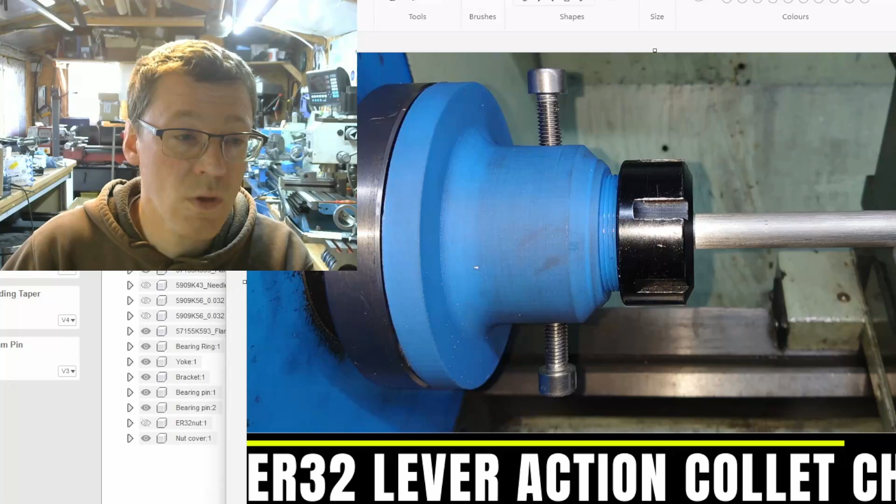Now, a little while ago I made a video about this ER32 lever action collet chuck, which I made a prototype of, and there was a lot of really good feedback, and I've taken what I can of that feedback and fed it back into the model and basically brought it to essentially a complete model. I haven't built it in metal yet, but let's have a look.

As you see here, it's a bit more developed than last time, so I wanted to sort of finish this concept, push this through to a slightly more finalized design, and I think I've got there using some of the feedback that I was given. A lot of the feedback would have pushed the design in a different direction, or basically meant a completely different

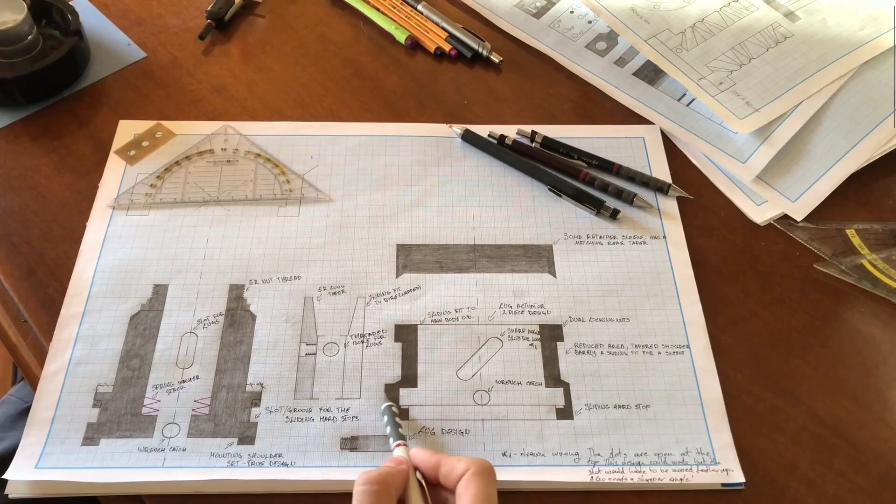concept of operation. So one of my viewers very kindly made a video explaining his thoughts on it and how it could be made better, all of which were really good ideas. However, it did change the way it would operate quite significantly. But the completed model is now available on Printables.

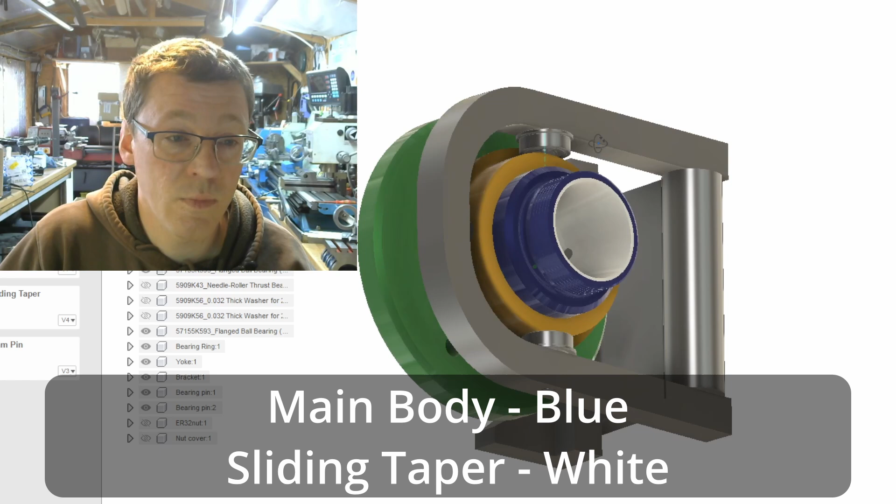I've uploaded the Fusion file and the drawings for the core components, which are the main body, which is here, the sliding taper inside, the bearing ring, which is this yellow ring here, which the lever bearings roll on, and the lock ring in the back, which retains the Belleville washers.

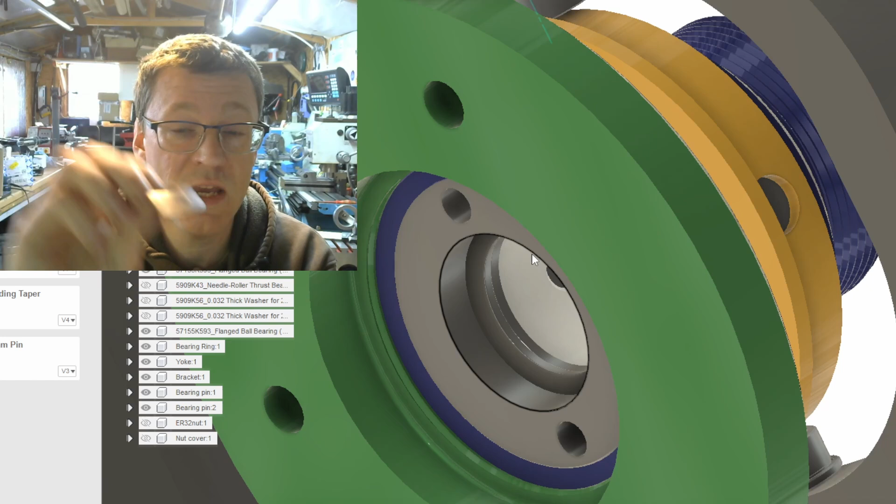I don't think in the last video I told anyone what the actual washers were. They are 40mm outside diameter, 20.4 internal by 1mm thick. Now they provide around about 1,000 newtons of force, and they provide about 1mm of travel each. So I've got them stacked up opposite to each other. That's basically what we call series. That gives me 2mm of travel with the same amount of force.

If you put them both the same way up and stack them, I'm not sure this really shows up on the camera, that puts them in parallel, and that would double the force required, so it's effectively making it twice as thick. That's the nice thing about these washers. They can be stacked in series and parallel to give you different spring rates and behaviors.

The 1,000 newtons should provide a reasonable amount of clamping force. One of the comments fed back that the 130 newton meters of torque that an ER32 nut can be torqued up to, that's sort of a maximum value, would equate to about 18,000 newtons of clamping force. Now, this is 1,000 newtons of pushing force on the back of the collet, so I still don't really know how that translates to clamping force. I don't know whether it goes up or down, but 130 newton meters is a lot.

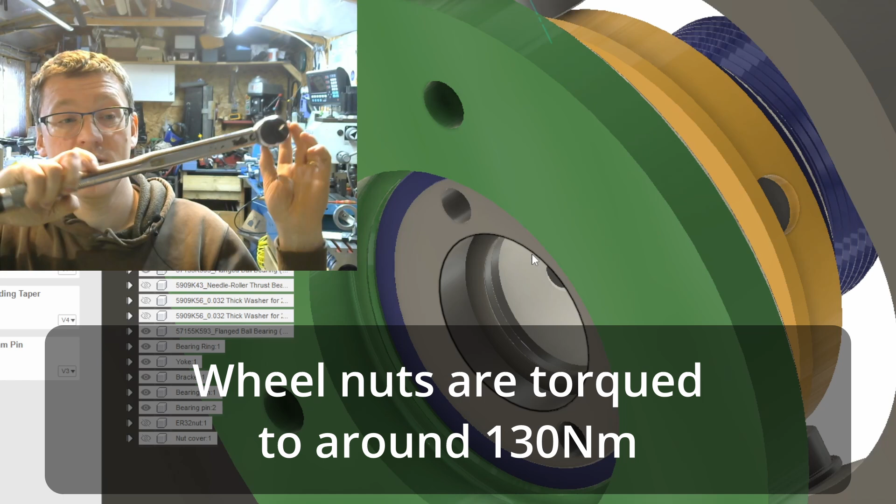This is the torque wrench that I use to do up wheel nuts on my car. It's about 2 foot long. These are the tools that I use to do up my ER32 collet chuck, and they're about 1/3 the length of the torque wrench. So there's no way I'm putting 130 newton meters of torque onto my collet chucks, and

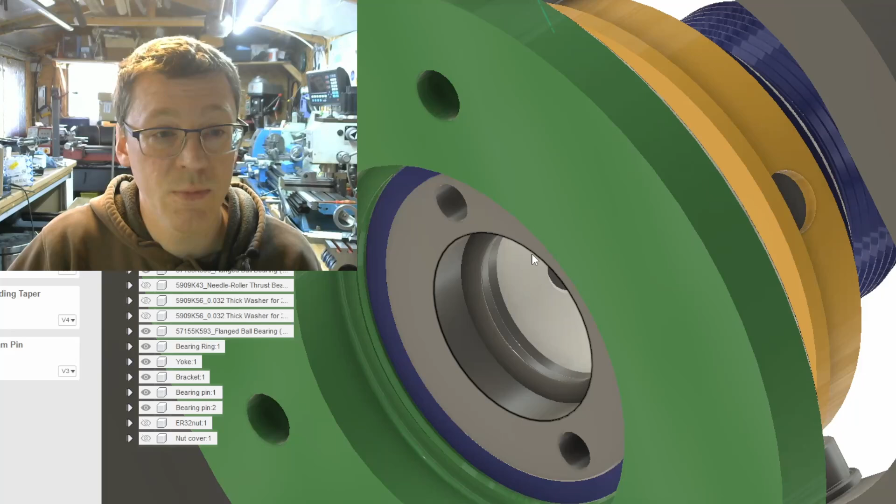I've not had slippage issues, which I'm hoping means that when this thing gets fully built up in metal, whether it's just one of these or whether we need to double them up or get some thicker ones just for a bit more force, I think there should be enough force to do some useful work with this collet chuck.

I wanted to address a few of the comments that were made because there were lots of them. So if you're interested in all the comments, just go to the old video, that's where you'll find them. But I'll just go through a few of them here that are immediately pertinent to the design. So one question was, why? And essentially, a lot of people have got ER collets and don't necessarily want to invest in another collet system.

So I came up with this idea, it's been brewing in my head for a long time, and the idea being that it's small, compact, relatively easy to make, and it would mean you could have a quick action collet chuck using an existing collet system if you happen to already have ER collets. There's also a bit of an interesting problem to look at. I'm not a mechanical engineer, so even though it's a simple mechanism, it was just trying to work out how the sliding and rotating bits would all work together.

A lot of people seem to like the idea of using the Belleville washers, and that was one of the driving reasons for this particular design. I've never really used them before, so I just wanted to do something that used them and get a feel for how they work, what kind of forces are involved. You can read the fact that they take 1,000 newtons to compress on a data sheet, but for me at least, until I've felt that in reality, I don't really know what it means.

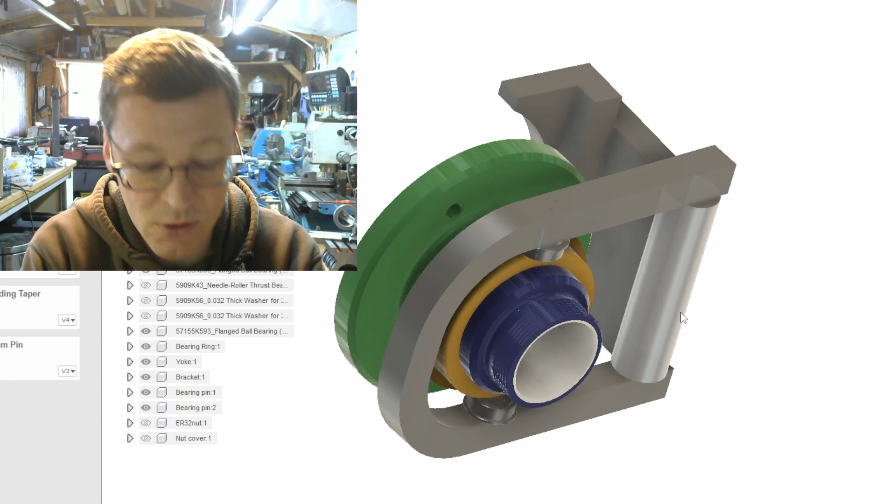Someone said, why would you ever need such a thing in the home shop? You probably wouldn't. The idea behind this was, like I said, just an interesting problem that I wanted to solve. But quite often with tools, you don't know you need it until you've got it, and then you find reasons to use it. I think that's why a lot of us have got many of the tools we have, not because we need them, but because we want them.

One really valid concern was stress on the bearings of the headstock and the casting. Now, the bearings for my lathe are these large taper roller bearings. These are good for 8,000 newtons of force through them. So if there was the full 18,000 newtons of force going through these bearings, that would probably be bad.

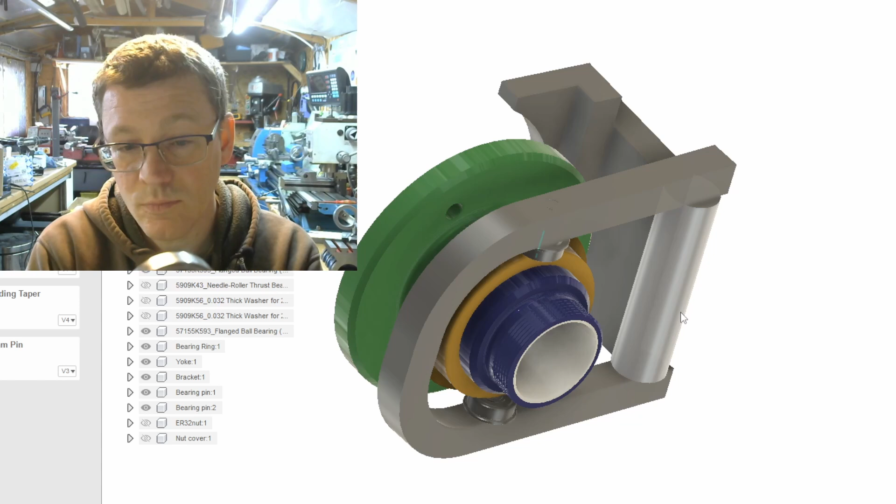But at the moment, with the configuration I've designed, it's 1,000. I think you could easily take that up to 4,000 and not really do any damage. Remember, it's only a transient load. These are rated for 8,000 newtons of continuous load. Obviously, that does include the preload that you put on them.

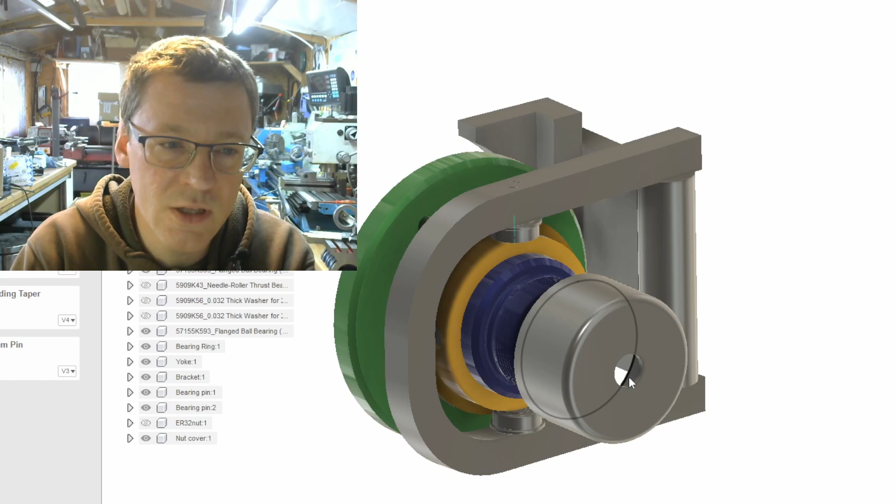Another thing was that the slits in an ER collet can easily get swarf in them when you're machining things, and you'd have to clean it out every time. My solution to that is a cover, which would be made out of some flexible material, 3D print or something, and that would just push over the collet nut. Make a series of them with different size holes, or you could make a hole with some slits in so it conforms to different size material. But I think that's relatively easy to keep the swarf out from that end.

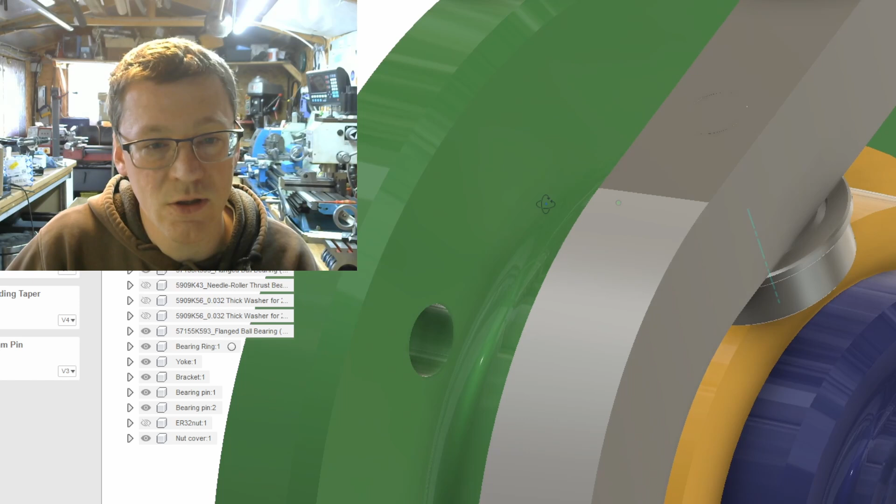The other area where swarf can get in is around the bearing ring, where the slot is for the actuating arms. However, I've designed this bearing ring to cover up the entire slot, both in the open and closed positions, so that you shouldn't ever really get any dirt inside the chuck. Now, obviously, you could get dirt inside from the back direction, but as long as your spindle bore is clean and you're using the front cover, then you shouldn't ever get any swarf in the spindle bore.

One really great suggestion was a set true adjustment. That's when you've got some screws around the perimeter of your back plate so that you can adjust it to run perfectly concentrically. That would be a brilliant addition to a commercial product so that you could true it to your lathe. The thinking behind this one, though, is that because you're going to be making this on your own lathe, should you choose to do so, the taper in the chuck should be completely concentric to your lathe. Then it's just a case of rotating the collet in the nut when you set up to get the best concentricity you can.

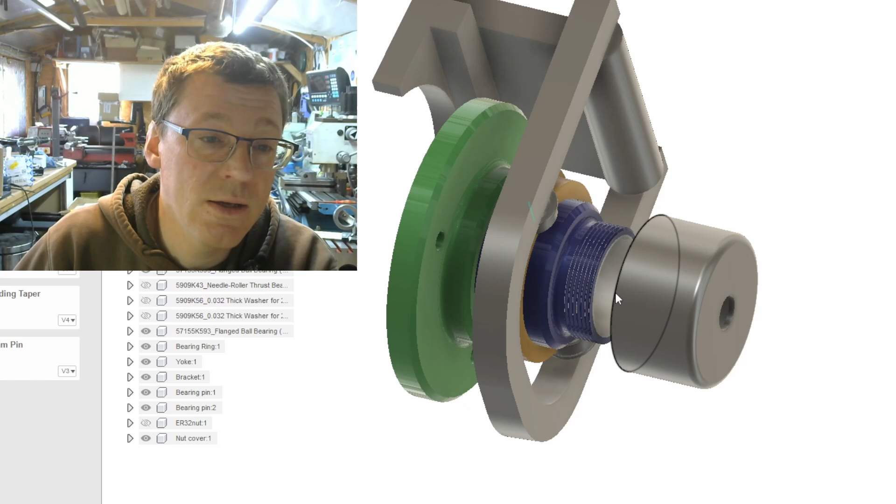As the sliding taper goes in and out in a linear fashion, you should never rotate the collet, assuming when you pull the bar out for your next part, for instance, if you've just got a long bar in there, assuming you don't twist, then it should stay pretty concentric.

Now, there were loads of suggestions for even better improvements, like doing an over-center mechanism, like on the We Can Do That Better video, which lots of people suggested. I have seen that. That's almost certainly a much better way of doing it, but it deviates from the initial concept. So this is a Belleville washer, spring actuated design. Maybe at some point in the future I'll do a bearing locking design.